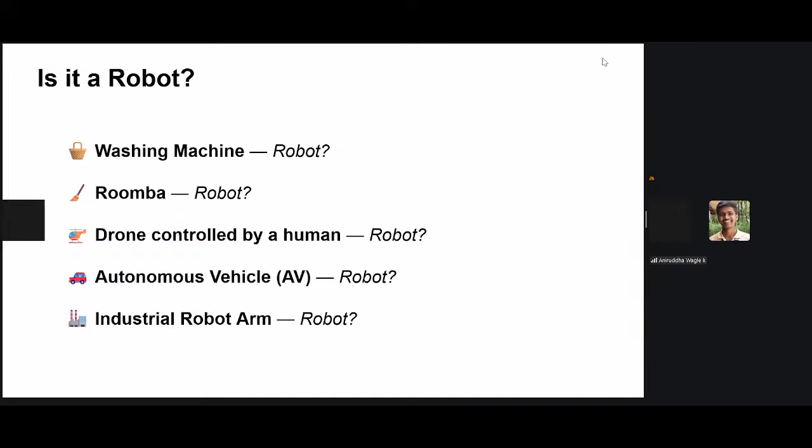So we'll move further into this. Before we dive into space robotics or some complex robotic systems, we will try to understand something that is much easier to understand when we talk about robotics. So we'll take TurtleBot 3, which is an open source differential drive robot for indoor navigation. We'll take this open source robot and try to understand the basics of robotics, because taking a Mars rover or something like that and understanding robotics is a little bit difficult. But this TurtleBot 3 makes it very easy to understand things. So I'll take this as a reference throughout my presentation to understand robotics.

This TurtleBot 3 is majorly inspired from the Roomba. Roomba is nothing but a vacuum cleaner that we have in our houses, and it autonomously navigates all around the house and cleans it. You might have seen cats actually playing with this Roomba, or sometimes sitting on top of it and navigating all around the house. So this almost acts like a human - it has the perception of the environment and it navigates by itself.

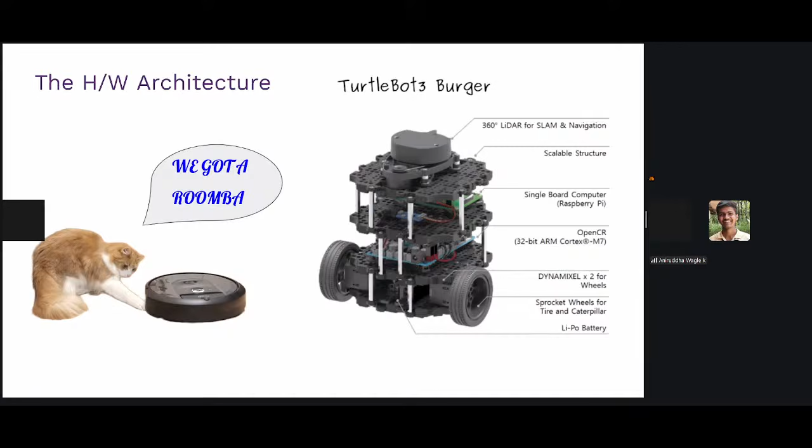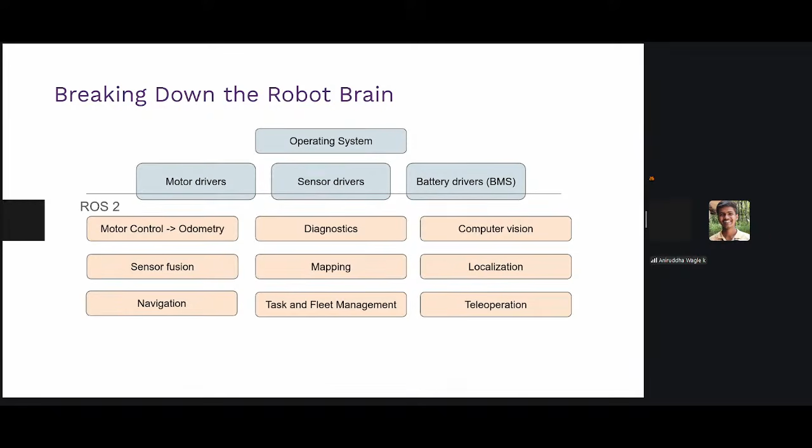When it comes to robotics, the suggestion for students is that you can get a lot of hardware like Raspberry Pi, motors, and many more things. But for the software part, instead of rebuilding things or creating something from scratch, you can use ROS2, because a lot of packages required to get the perception of the environment will already be there in open source in the format of ROS2.

So we will try to understand what kind of robots we have in the industry generally, and then we'll dive deeper into software architectures and many more things - how a robot perceives the world, how it navigates, by taking the example of Turtlebot 3 itself. Before that, we'll just understand what kinds of robots are present in this world, in the industry.

Majorly, two kinds of robots are majorly available in the industries: one is mobile robots, and another one is manipulators. Amazon has already deployed more than 1 million robots in its factory, which is almost reaching one robot per one human worker, mainly in its warehouses. These are mobile robots and manipulators, not humanoids, because humanoids are still in the research stage.

Whenever we say robots or robotics, the first thing that comes to our mind is humanoids. But actually, humanoids are still not deployable. I mean, in some regions it is at a level where we can deploy it, but in some regions it is not well developed. So it's still in the R&D stage, we can say.

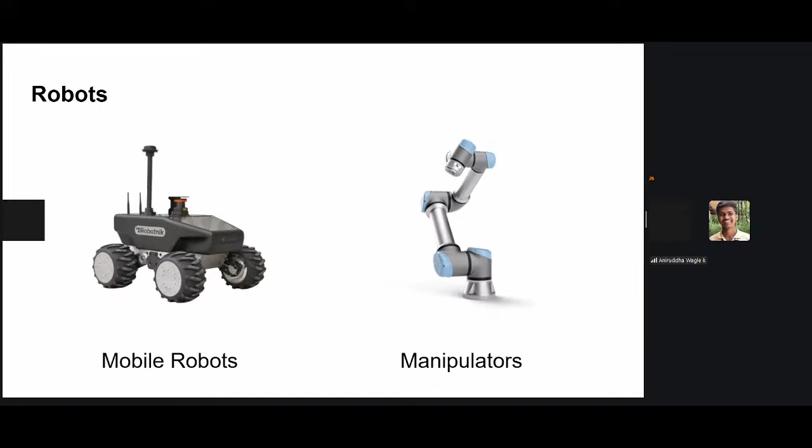The two major kinds of robots that are deployed and working, mostly in India, are mobile robots and manipulators. Manipulators as cobots we can see in industries like manufacturing most of the time. Mobile robots are used in warehouses most of the time, for sorting and getting items from one corner to another corner, something like that.

If we go deeper into wheeled mobile robots, majorly we will see AGVs and AMRs, which are mostly present in warehouses. AGVs are nothing but automated guided vehicles, or automated ground vehicles. AMRs are autonomous mobile robots. AGVs were present previously - guided vehicles had some guidelines, in the sense some RFID tags or magnetic guides, through which these robots were moving from one place to another.

Nowadays we have something called AMRs, autonomous mobile robots, which don't necessarily require guides. It has lidar and camera modules in it, so that it gets the whole perception of the environment. Sometimes it has a map already, so that it can go anywhere in that map without any guide.

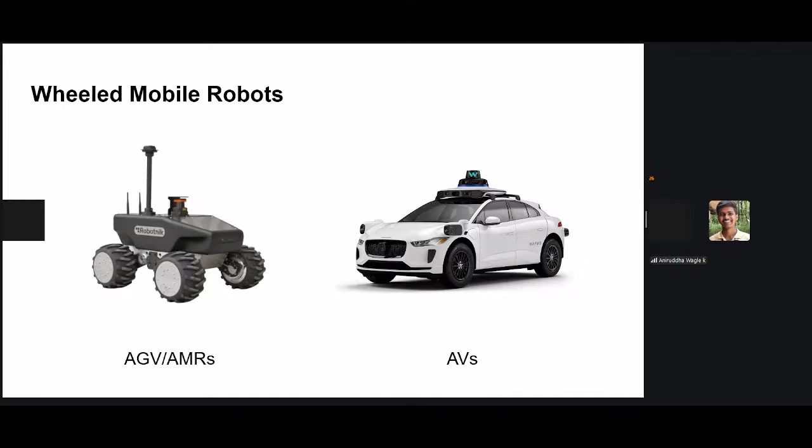I think it's Google's Alphabet, one of the companies under Alphabet.

Other than these wheeled mobile robots, we have legged robots. When the area or environment is uneven, you need legged robots because you can't go with wheeled mobile robots on an uneven surface. So we have bipeds, which are humanoid robots. You might have seen this Unitree robot, which we've seen in IIT Bombay's festivals and in RoboCons and some conferences. These Unitree robots are from China, and they are actually distributed in India as well, used for many things.

You can see quadruped robots which have four legs; we usually call them robot dogs. Most of the time we've seen this kind of robot, which the Boston Dynamics research organization publishes videos of, right? We've seen that. Then we have hexapods, which have six legs.

These kinds of robots are used where the surface area is not even and you cannot use a wheeled mobile robot. In that case you can use these legged robots; they can actually go on uneven surfaces like mountain areas. Most of the time these robot dogs are used in the defense sector. For Mars rovers, most of the time they use wheeled mobile robots, but they can also use quadruped robots.

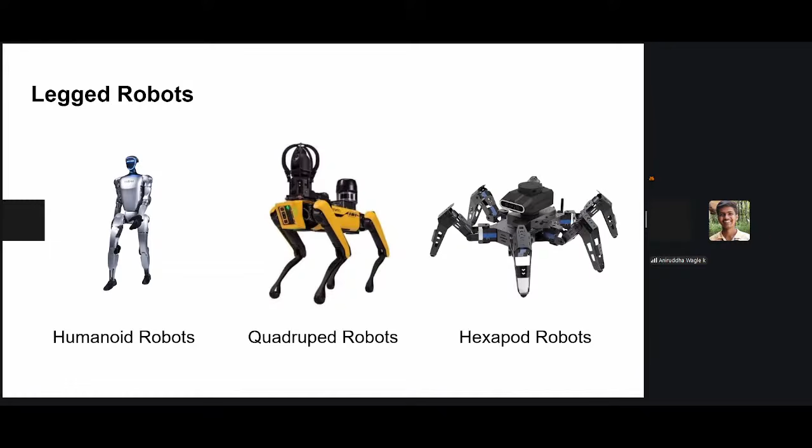Other than these, we have underwater robots today, because deep inside the sea it's riskier for humans to go. And drones are also majorly considered as robots, sometimes semi-autonomous, sometimes completely autonomous. We also have swarm robots, which we see in warehouses most of the time, and in hotels as well. And we have space robotics, robots specially designed for space, to go to other planets and do research.

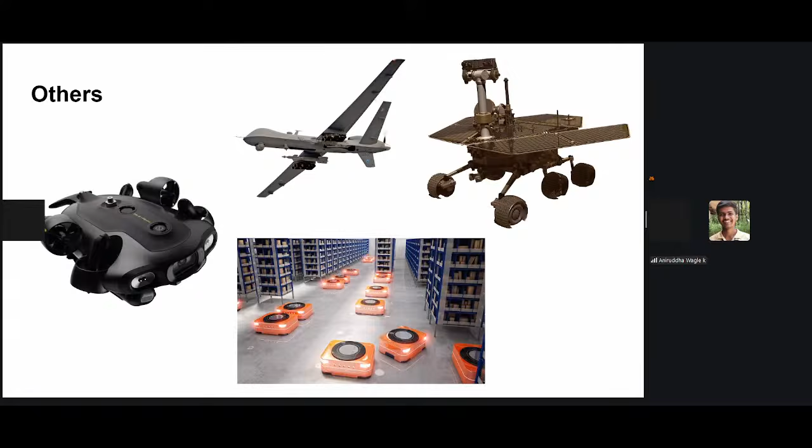When it comes to robots, we have to talk about different types of drive mechanisms. The TurtleBot that I showed you earlier has a differential drive. Most of the robots we see in the educational area are differential drive, because the mechanism is very simple to understand, rather than directly going to Ackermann steering or skid steer or other kinds of mechanisms.

In wheeled mobile robots, we have different kinds of drive mechanisms. One is differential drive; the TurtleBot 3, which you can see here, has differential drive. That means it can have two motors and two wheels, plus another wheel which is a free-moving wheel, usually called a caster wheel. With this, it can move in the indoor environment.

A similar but slightly more advanced version of this is the skid steer mechanism. This is a skid steer robot, which has four wheels, but it works on the differential drive mechanism itself, though there will be a bit of drag and the kinematics changes a little.

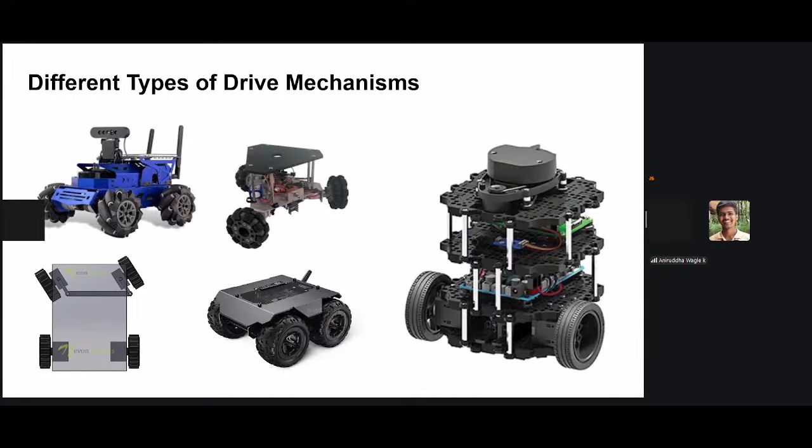We also have another mechanism called the Ackerman mechanism, which is a wonderful mechanism. You can visualize this mechanism in your cars, where the drive wheels might be the front two wheels or the rear wheels, but the direction is given by the front wheels itself. This front-wheel mechanism is called Ackermann steering, and these are mostly used in outdoor robots. Then you have the tricycle model, and omnidirectional wheels and mecanum wheels, which allow your robot to move in different angles rather than having a simple architecture like differential drive.

To get started with these wheeled mobile robots, some open source repositories or projects I want to share with you are Andino and TurtleBot 3. A bit costlier one is TurtleBot 4, but it's more advanced — it has extra capabilities like a depth camera, so you can do visual perception as well, like Visual SLAM.

Also, you have Tortoisebot by Rigbetel Labs. All these are open source projects that students or beginners stepping into robotics can start with, because the hardware is very cheap and the software is open source. Even the hardware is open source, so you can get all the required hardware easily.

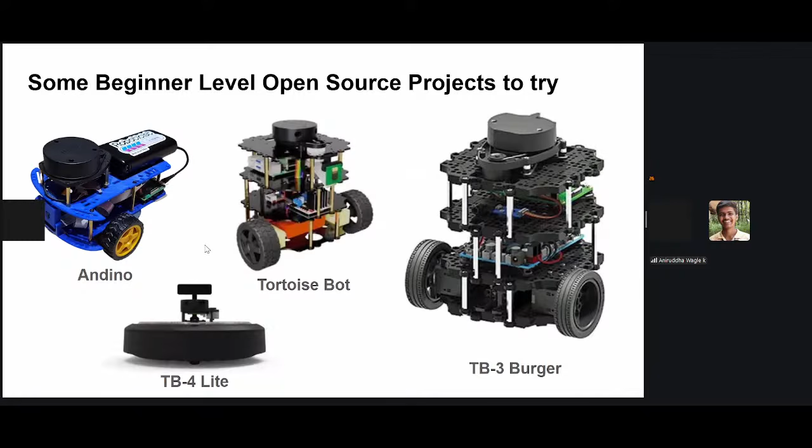So let's dive a little bit into autonomous vehicles architecture, to understand what are all the components in this. Majorly, I work in the field of autonomous vehicles and indoor navigation bots, so I'm focusing more on these aspects of robotics. But if you start with this, you can actually jump into any field of robotics, because the major thing is perception.

How your robot perceives the world. There might be dynamic objects moving in the environment all around the robot. How you avoid those objects while you navigate, how you detect them, how you track them, how you predict some of the things. All those will be taken care of by the perception block in your autonomous vehicle.

Once you perceive the world, how you perceive the world is because of the data coming from the sensors. The sensing module is connected to a lot of sensors. It is software along with a lot of drivers, and those drivers talk to hardware like lidar, camera, and GPS, take the data, and give it to the perception module.

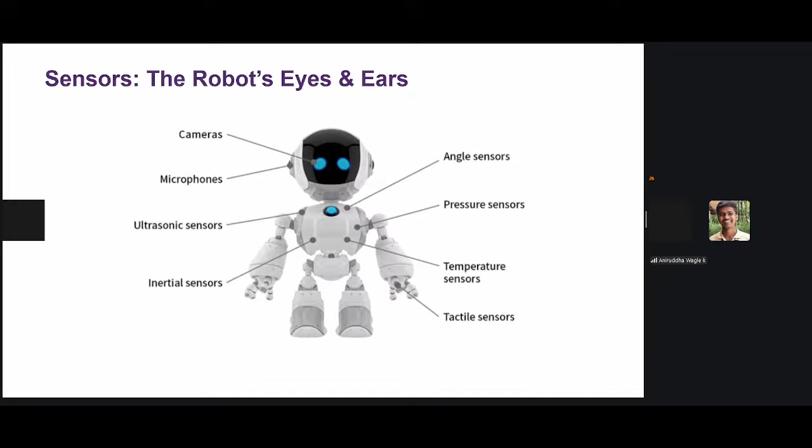So if we dive deeper into the sensors, we can divide this into the sensors required for perception, sensors required for motion and orientation, sensors required for position and movement. So let's dive deeper into one by one. So the sensors that are required for the perception. Perception is nothing but you're going to understand the environment.

So if we dive deeper into perception, the sensors used for perception, you can see camera. Camera is majorly for the vision and object detection, tracking, recognition, and all. So a lot of cameras are used, monocular, depth cameras, and RGB depth cameras will be used sometimes. So these kinds of cameras are used to get the vision. Depth cameras are used for vision as well as the depth of any image that it is going to get.

Okay, so then we have one of the majorly used sensors, which is lidar. The full form of lidar is light detection and ranging. So lidar is a kind of sensor which has a laser sensor in it. So 2D lidars and 3D lidars are majorly used for getting the distance between the surrounding objects as well as for mapping the environment. To map the environment, we can also use cameras, but most of the time we use lidars.

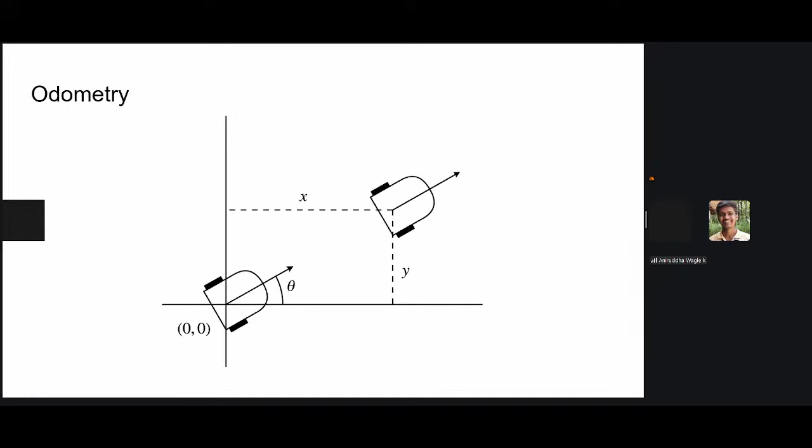So we have understood how sensors give the data, how to take the sensory data, and how it helps the robot understand where exactly it is using odometry-related stuff. There are other things that sensors do, like lidars give perception to the robot, and many more things. So now let's talk about actuation. We'll cover the think part a little later.

So actuation is, once you give the sensor data, once the robot understands the physical environment, it starts thinking what to do next and generates some actions. Those actions will be done by using motors and such. If we compare robots to humans, humans have legs, hands, wrists, ankles, certain joints and links, right? Similar things will be there for a robot, which are actuators to execute decisions and control the hardware.

So we have a lot of actuators like DC motors and servo motors. DC motors are the normal motors which everyone understands, I guess. But servo motors are used in scenarios where you need precise angular positioning, right? Stepper motors will be there in some places. In some robots, you can see BLDC motors. BLDC motors are brushless DC motors, mainly used in drones.

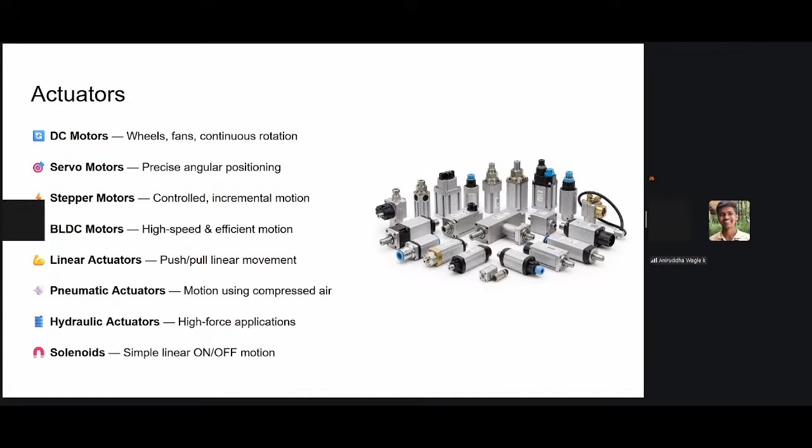Okay, so then you have linear actuators for certain works; we mainly see these in hydraulic systems. Then you have hydraulic actuators, pneumatic actuators and solenoids. These kinds of actuators you can see in robots.

So now we have seen certain sensors and certain actuators. Between these sensors and actuators, you are going to see a lot of computation going on, and the computation will be handled by computation units like Raspberry Pi or Jetson. In industry, they will be using industry-grade computers and sometimes high-end Jetsons.

But for a hobby person, it's preferred to start with Raspberry Pi kind of simpler single board computers. Raspberry Pi is a computer, a simple computer similar to a computer, which helps the robot to think. Lots of sensors and actuators are actually connected to these Raspberry Pis, so the major computation, the software, is running in this Raspberry Pi.

So it's similar to your computer. It can have an OS. Majorly, we flash Ubuntu based Linux based operating system in the Raspberry Pi. So it has many models, like Raspberry Pi 4B, Raspberry Pi 5.

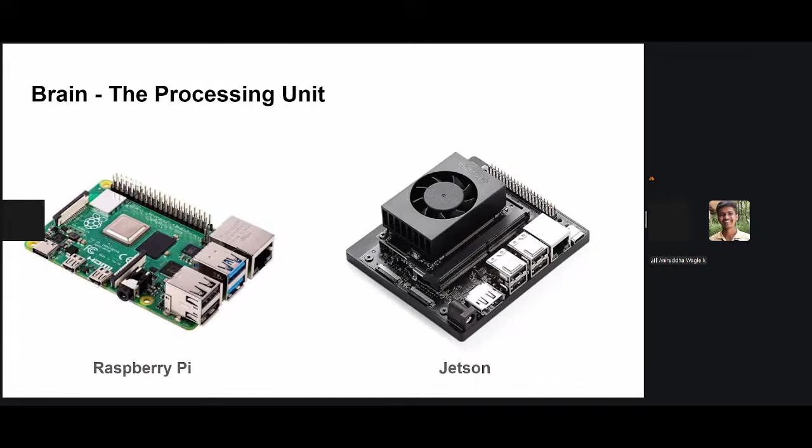So a robot will not only have microprocessors in it, it will also have microcontrollers. You might ask me why microcontrollers when you have high-end processors in it. So before I answer that question, let's understand what these microcontrollers are.

These are covered most of the time in the embedded system classes or embedded system theme. But I'm bringing this into the robotics lecture because embedded systems is one of the major stepping stones to start your robotics itself. Because at the end, whatever you make in software in the simulation, you have to deploy it in the hardware to call it a robot, right? So hardware is nothing but these microcontrollers and microprocessors and all that stuff.

So microcontrollers usually have a bit less memory, but the software layer in these microcontrollers is very thin. If you take Raspberry Pi, you will be having an OS layer, so whatever programs you run there, a bit of delay is going to affect you. But the delays are very less in these microcontrollers because they are bare hardware on top.

You directly write your program. So the time critical tasks like motor control, getting feedback from the encoder, you should not miss some of these things. That's why you actually integrate the motors, encoders, and all these sensors and actuators to the controllers, because these controllers are more real time compared to processors due to the software abstraction layers.

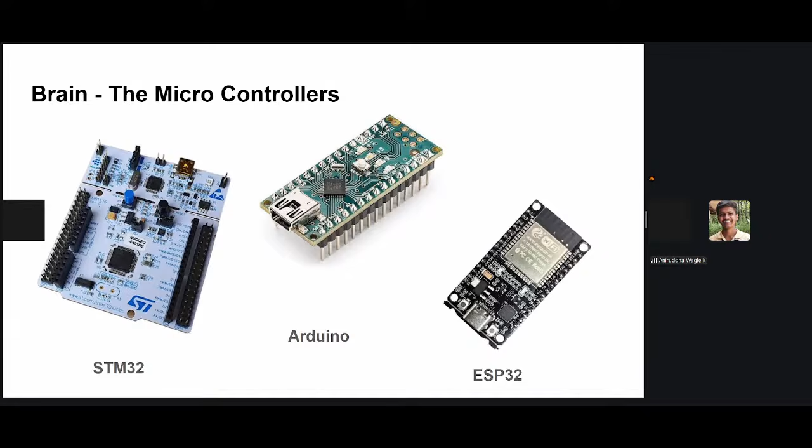So we generally use STM32 or Arduinos for beginners, and ESP32s and all. These will have Cortex M series chips in ICs in them, which do real time tasks and all. So that's why we have microcontrollers as well as microprocessors both in a robot.

So I said we are going to use processors as well as controllers in our system. So how are we actually distributing our work?

If we take the example of TurtleBot 3, the computing is distributed because we can't give the whole task to one processor. So what we do is divide the tasks. Certain tasks run on the remote PC, certain tasks run on the single board computer which is the Raspberry Pi, and certain tasks run on the low level computer. In any robot, you can identify a lot of processors and controllers all working together. This is possible because of a technology called distributed computing. To do this distributed computing, ROS2 helps us majorly, so that's why we use ROS2 here.

I'll explain about ROS2 in the later slides. Before that, I'll tell you what the software modules are. Whenever we say the brain of the robot, we can't just wind up with the hardware like Raspberry Pi or Jetson. We also have to talk about the software packages that are running inside that brain.

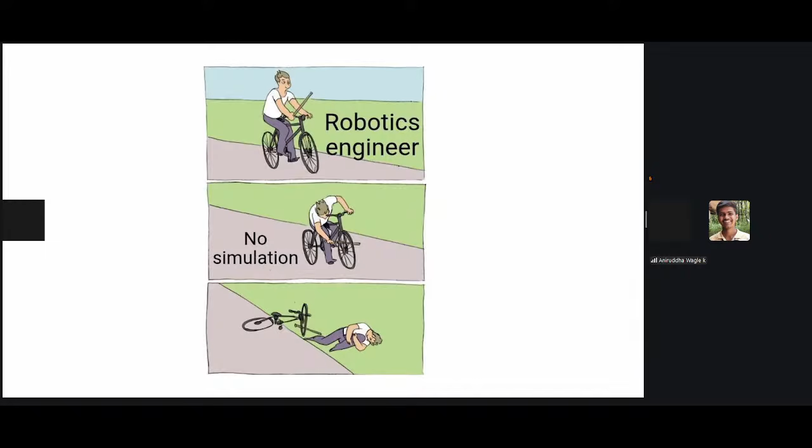I'll just continue with the slides. So I was saying that you have to simulate first and then deploy that code in the hardware. We use certain simulators called Isaac Sim or Gazebo to simulate our robot initially and then deploy it in the hardware. So before we dive into all those topics, let's understand what is ROS2.

ROS2 is a distributed robotics middleware framework used to build modular, scalable, and real-time capable robotic systems. It's a collection of open source libraries, tools, and packages that helps you build your robot software without writing everything from scratch, as I explained in the earlier slides.

In ROS2 we have certain distributions, like Humble Hawksbill, Jazzy Jalisco, Kilted Kaiju, and others. Some of these are long-term supported distributions, and some are not meant for long term—they're just for testing some features. Beginners can start with Jazzy Jalisco because that's the current stable version, and also Humble Hawksbill.

But Humble Hawksbill is going to reach end of life by 2027. So I'd prefer beginners start with Jazzy Jalisco. There's another new distribution coming, but it might not be as stable as Jazzy, so you can start with Jazzy. You'll mainly need Ubuntu 24 OS for all this to work.

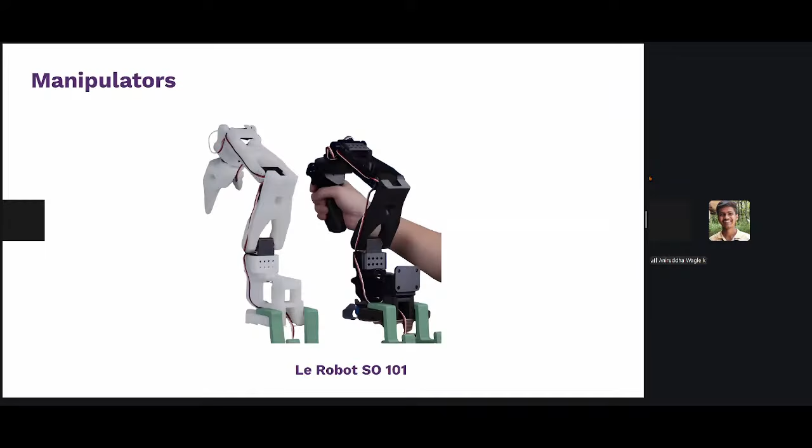With this, we'll try to discuss a little bit about industrial robotics. What is the scope of robotics? Who are going to hire robotics engineers, and who are the major players in the robotics domain?

When we say major players, the big companies are ABB, Fanuc, and KUKA. These are the major companies producing robots and also having a lot of openings for robotics engineers.

Other than this, in India, there are a lot of startups and well-grown companies. In the space of warehouse management, you can see Unbox Robotics. In the construction industry, you can see Origin, which is working for the US construction industry, developing mobile manipulators, a combination of mobile robots and manipulators. There's also another company called CynLr, I don't know how to pronounce it, which is working on advanced robotics stuff.

There are a lot of research organizations working in soft robotics and other areas. So there's a wide variety of opportunities in this field, and the good thing is IIT Madras has released a new paper for Robotics and Automation in GATE 2027, so robotics people can now write Robotics and Automation in GATE and do their MTech in the Indian Institute of Science and such big colleges.